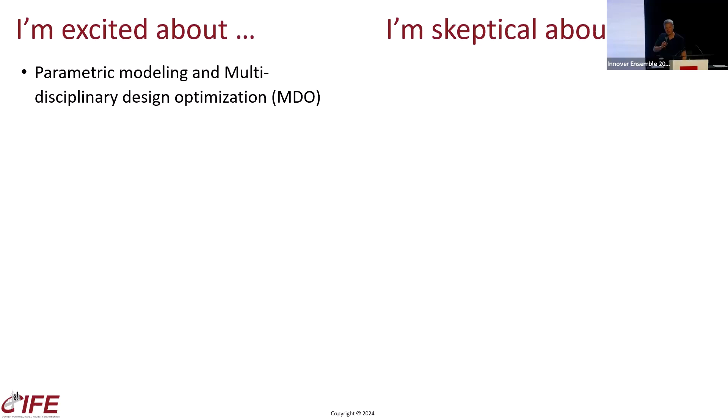I really liked the projects this morning, and I look forward to the others this afternoon. In the context of things that get talked about a lot, I just want to say a few words about things that really excite me, and then things I'm a little bit skeptical about, but would be happy to adjust my skepticism if you give me good reason for that. I really continue to be excited about parametric modeling and multidisciplinary design optimization. I think we can do a lot more with that.

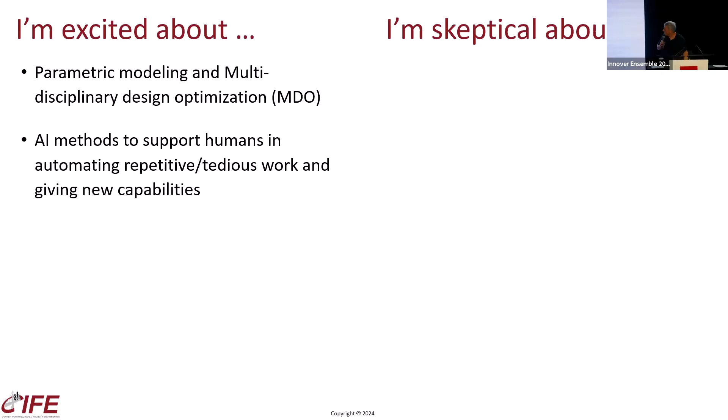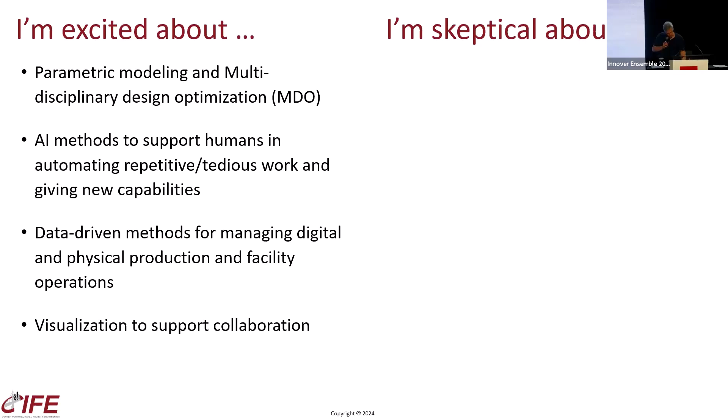I also like, as I think Danielle presented, AI methods that really support us humans and automate repetitive, tedious work, or give us new capabilities, allow us to do things we can't really do, see patterns in data that we couldn't see ourselves. Like data-driven methods for managing digital and physical production, really good visualizations of all kinds that support collaboration, and the concept of circularity.

Some things that I'm skeptical about are Gen AI and ML on the basis of information from past projects. I'm really not sure about that for two reasons. Few companies or organizations that I know in our field actually have reliable data from the past that is organized in any kind of reasonable way.

And second, I'm not quite sure what we want to learn, because I see the practices we are going to do to be quite different, much more digitally supported. So I'm not quite sure what we will actually learn from looking at data from experiences that were largely in an analog way of doing work. But you can adjust my thinking if I see this wrongly.

And the other one is, I love the concept of circularity, but I'm wondering about the feasibility of implementing circularity at a component level. I see quite a bit of work in that area, but I'm not sure, given our need to really understand the quality of a component once it's no longer used in a building like this, and then finding a marketplace that matches that with other components. Other aspects of circularity I see as a bit more feasible.

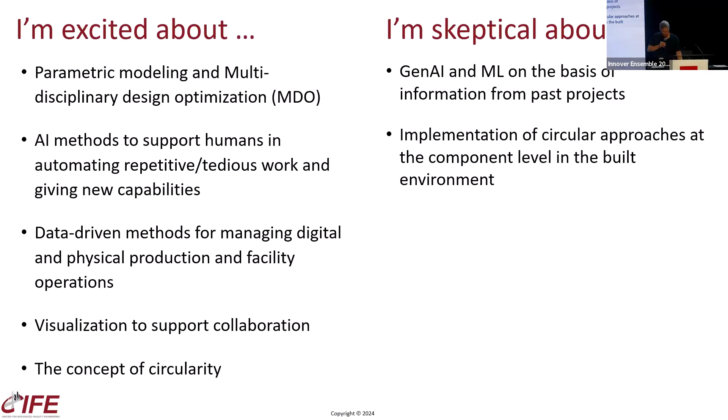So just wanted to preface this. Our approach to industry or academic collaborations has really three parts. First of all, create a solid foundation for innovation by making sure that industry projects are managed and run in what I would say are the best currently available methods that you can just implement because they have been proven to work. We call that virtual design and construction, and I'll illustrate that.

Then on that basis, bring incremental innovations into these practices, into those projects, but also with an eye towards potential future breakthrough performance, and then prototype some breakthrough innovations. Like create a vision of what could actually be possible, and I'll share some examples of that.

Always with industry participation. So every student that works with me and many of my colleagues has to be able to function in the real world, has to be able to perform in the real world at a reasonable level, because if they cannot, then they cannot gain the trust of professionals on which they depend to get data, insights, access to real situations, which then challenge the conceptual thinking and provide really a foundation for strong conceptual thinking.

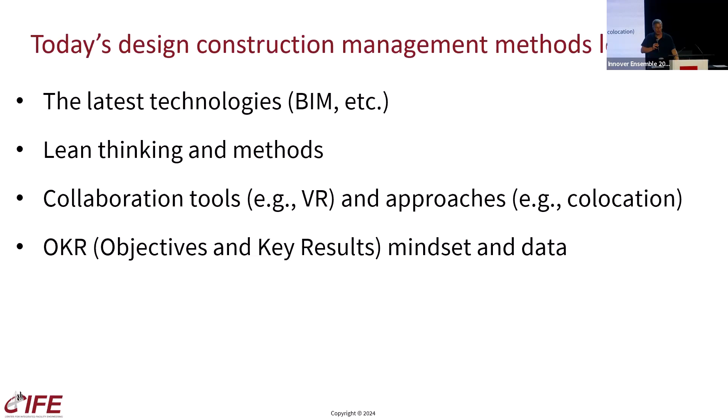This is what prompted us to develop this method, which we call virtual design and construction, which does bring together all of those elements. It connects the definition of objectives from the client and project team perspective with how people work together, how they use technology, and the production processes that they set up and follow. And of course, they are mutually connected, right?

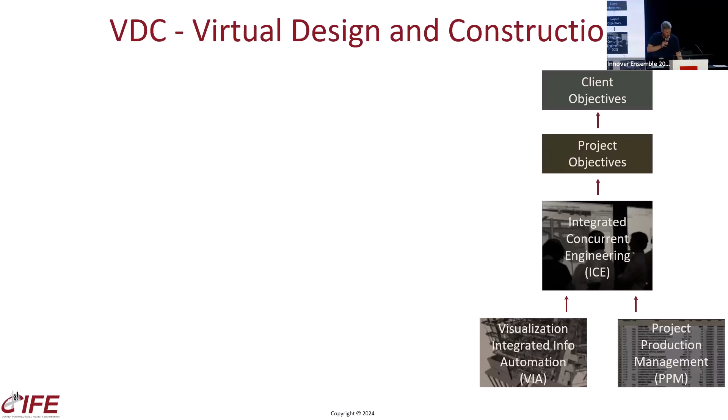If you need to create a particular kind of information, you need the workflows for that. Likewise, you can't carry out certain workflows without certain information. You can't have productive collaboration without accurate, up-to-date information. You can't really take advantage of the opportunity to do things concurrently if you don't design your processes that way. So that's basically the kind of interactions that we teach in this professional education program.

And so these are the last few groups of professionals we have been teaching in various parts of the world. This is a popular method in Norway, which is cool to see because they have some very cool projects there. So you see a little over 200 Norwegian professionals learning virtual design and construction in our professional certificate program. A third owners, a third designers, and a third builders.

And you see somewhat smaller groups, but still nice groups in Switzerland and in Peru. These are lately, for some reason, the main places where people have wanted to do this program. So let me share two examples from projects of how people are using VDC.

One is a few years back, but still one of the most impressive achievements I've ever seen a project team achieve anywhere in the world. And the project team signed up for this incredible challenge because they had actually done the VDC program, and they said, hey, if we use VDC from the beginning all together, we can achieve this.

Because the task was for the Pan American Games in 2019 that were held in Lima, to build all of the Olympic level facilities. In 2013, the Peruvian government said, yes, we will host the 2019 Pan American Games. In 2017, they were like, this requires Olympic level facilities. How many of those do we have in Peru? Oh, 0. How many has anybody here ever built something like that? No. So they had 16 months to design and build these Olympic level facilities for the Pan Am Games.

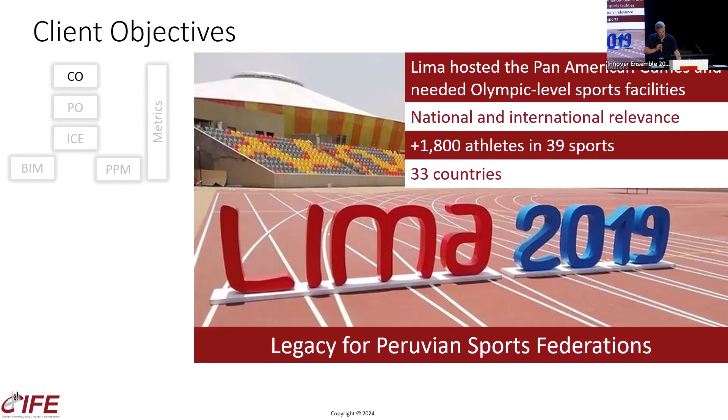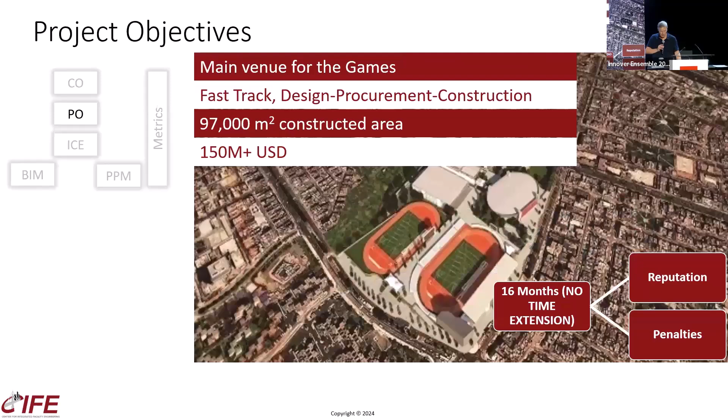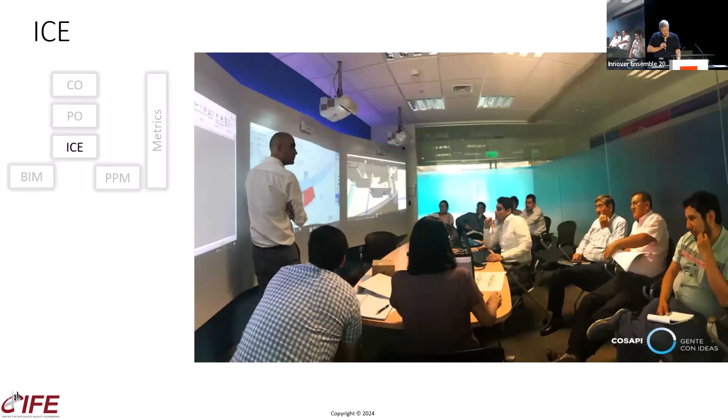So they were very clear. Obviously the timeline was really driving, and of course the quality of the facilities they had to build were really the key things. So they started the project with really intense collaboration. This is a picture of one of those collaborative sessions. Over the first 10 weeks of the project, because you got 16 months, you got to get going, they had 2-hour so-called ICE sessions. ICE stands for Integrated Concurrent Engineering.

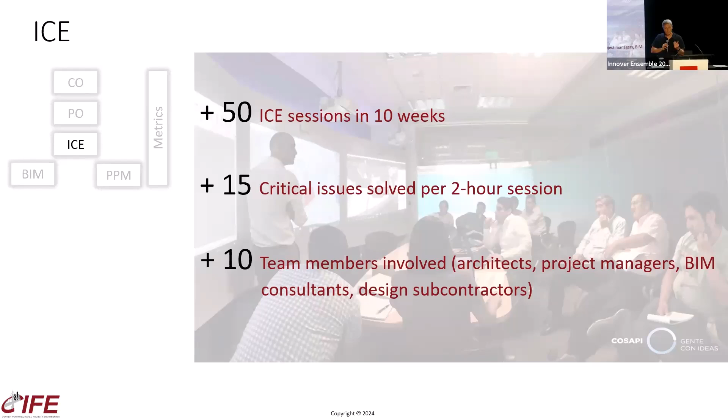This kind of rapid cycle I've seen in other projects having huge benefits because it reduces the number of balls in the air, right? And actually allows you to focus on what you have to actually get done and move on, instead of lots of just-in-case things that we find being tackled in many projects.

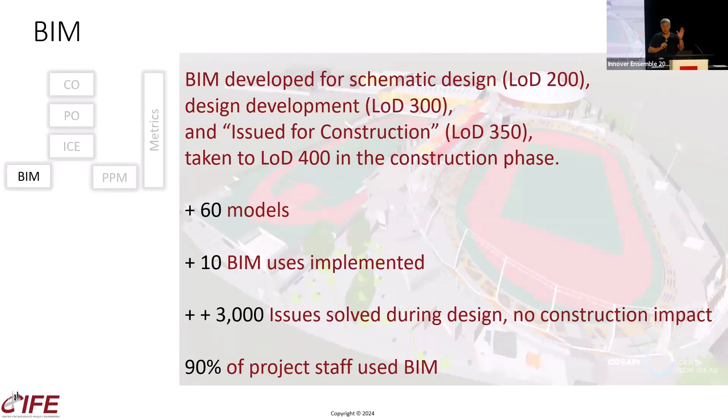They modeled everything in BIM. They didn't say, well, we don't have time for that. They said, no, we can't afford any mistake in construction. So we have to make sure everything we design is buildable and of course then usable and operable. So they had 60 BIMs, 60 different models, 10 main uses, 3,000 issues solved before construction. 90% of the project staff work daily with BIM. It wasn't some sideshow, it was how they did the work.

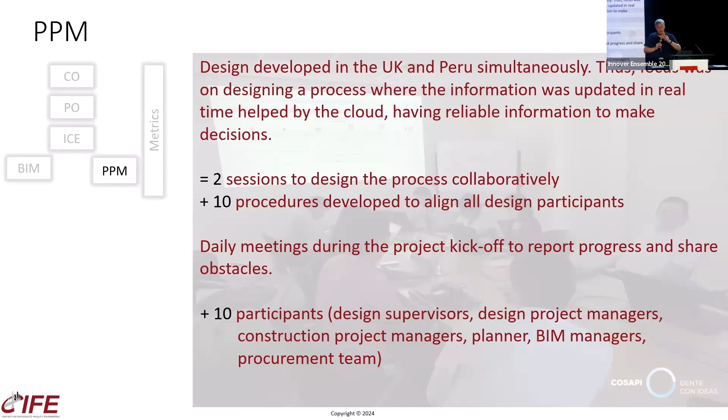And of course, they modeled the many production processes very carefully. They also had ICE sessions to develop those production processes. For example, the designer was Arup in the UK because they had the experience from the London Olympics. But then, of course, they had to be built in Peru. So they had lots of collaborations, had to define the common data environment, how they're going to use it. And they did that also with an ICE session, just to illustrate the connection between these VDC components.

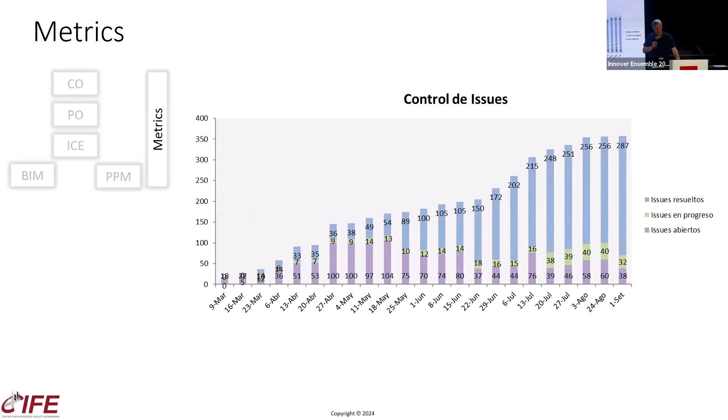And just to highlight some of this, I'm sure you've seen this on projects as well, right? Formulation of the processes, so everybody's on the same page and follows them. And then also definition of the production metrics they're going to use along the way, like every week, to see how things are going or whether an intervention was needed. So this is just a very quick glimpse.

The games, I think, were a huge success. Facilities worked well. And I think it's quite remarkable. You know, the project team said, yes, we can do this pretty crazy task because we will manage it with all the best tools available that we have today.

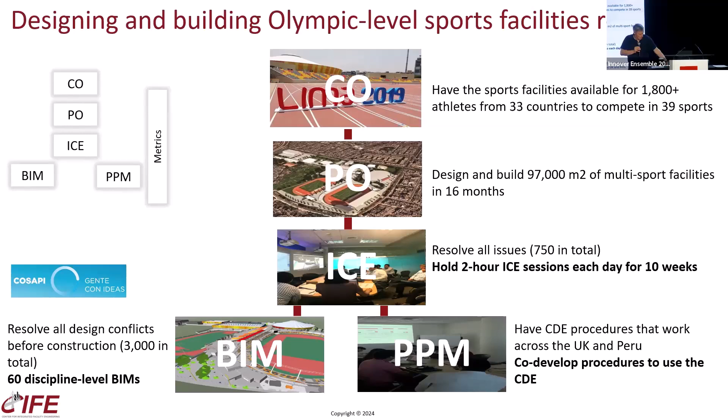A more recent example is actually here from Max. He was in the previous VDC. We have just started a new program like this, but he was in the cohort of professionals that graduated last year from the VDC program in Norway. I'll introduce him a little bit. The program works like this.

Basically, after a week of introduction, everybody goes back to their projects and applies VDC and reports 6 times, 6 months, on how that's going, and basically keeps learning by themselves and together. And so what you will see is what he did to bring the concepts that we teach in VDC to his organization and his projects.

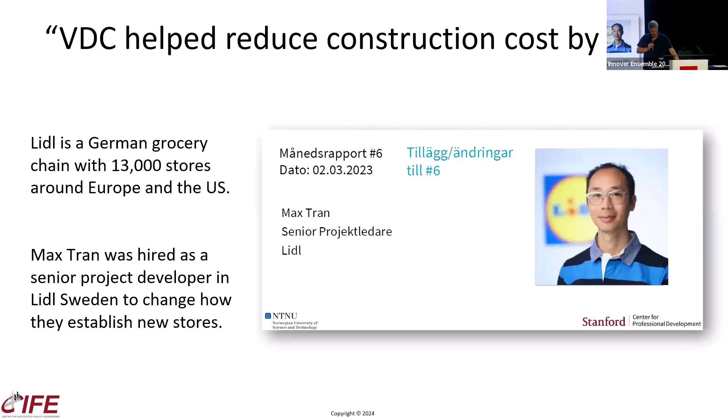Max is basically in charge of all of project management for Lidl Sweden. Lidl is a supermarket chain. I don't know if you know it, quite a big one, I think mostly in Europe. So they build these kinds of stores. He was hired because Lidl Sweden was in this place. So each bar is the cost of construction of a new store in a country where Lidl operates.

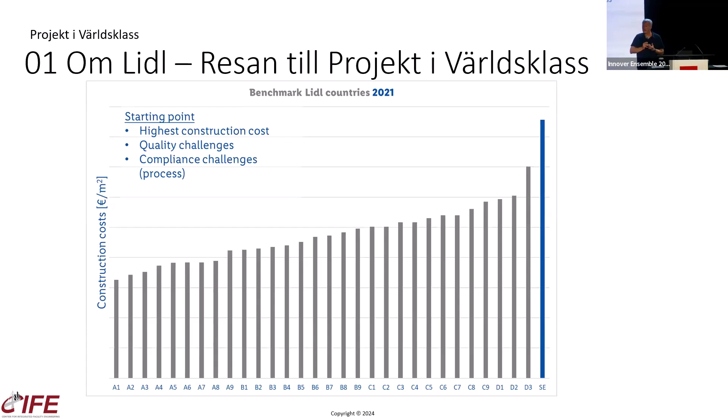So you can imagine how much fun it was for the country manager of Sweden to go to headquarters in Germany with the other country managers and see this: you're the winner of the highest cost per square meter for your stores. Of course, that's not the distinction they wanted to have. So they brought in Max. They said, we have to do something, we have to change. Clearly something is not working as well as it should in how we manage our projects.

Of course, what Max heard when he joined that organization in that role was this. Well, what do you expect? Come on. Each store is unique. How do you want to compare a store in downtown Stockholm with a store at the outskirts of a small town out in the country? They're totally different projects. And by the way, costs in Sweden are high. Everybody knows that. So where else should we be but on the right side of this chart?

Max was like, well, yeah, that's true. Labor costs and so on are high in Sweden. But is each store really unique? This you hear a lot around the world, right? Whether a company builds schools or hospitals or bridges, they're all unique. And to some extent they are. But Max was like, well, let's see if we cannot somehow simplify these stores or create more of a common basis.

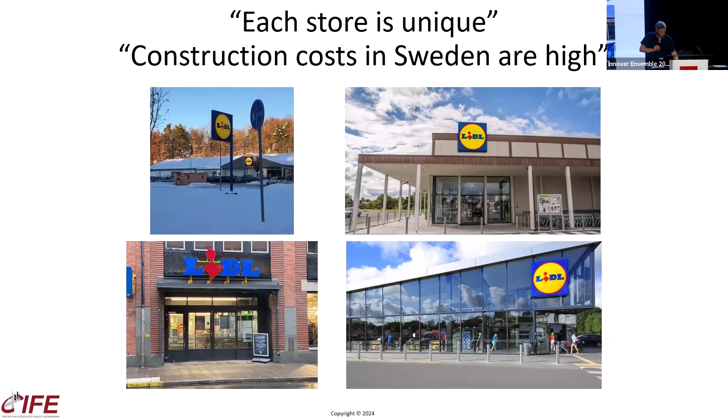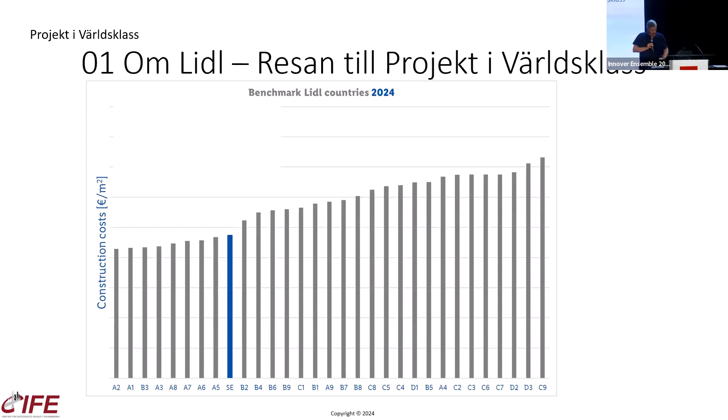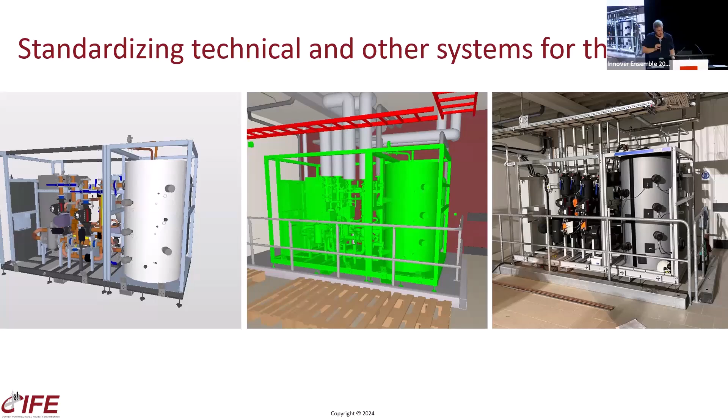And so basically they developed solutions that could work for every store, and the store could just say, yep, that actually works. We're done. Before, they would hire a designer, make the design, review it, et cetera. Takes a long time and ends up with a sometimes questionable approach. Basically, what came out of this is a master BIM, as they call it, at level 350. So quite detailed, that every manager building a new store has to start with.

And then they have to build their project on the basis of this master BIM. Of course, some aspects are local and unique, so they can adjust those. But this allows them to only focus on the things that are truly unique. The rest is like, we've done it. We have learned our lessons. We know what to do.

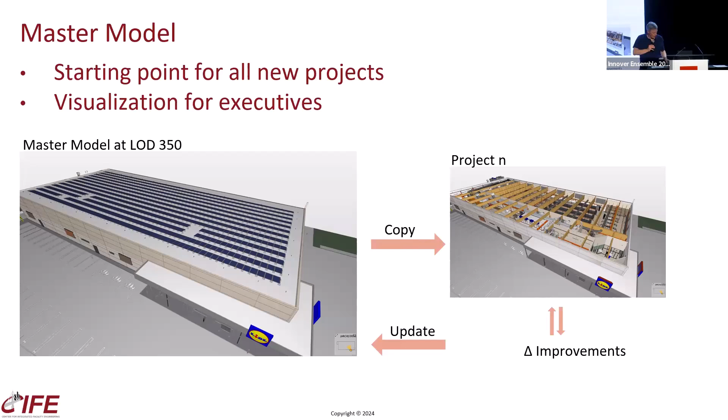And then they're expected to provide updates, improvements to this master BIM from their store so that the next store can start with an even better starting point. Improvements in terms of technical solutions, but also in terms of the information in the BIM, how it's being used and so on. So this has had quite a good effect.

The decision latency, this was actually a few months back. Now it's even better. But even a few months back, they made 75% of decisions within 1 week, and almost all decisions within 3 weeks. And you could say, well, the key thing is not to change your decisions. You can make a decision fast, but what's the point if you change it later? But they only change 1 in 33 decisions. So they also make good decisions that they can stick by.

Actually, the most recent data is their decision latency is 1.1 days with a variance of 1 to 5 days. So quite predictable. Before it was, I think, right around 5 weeks with a variance of 1 to 16 weeks. So nobody could really count on when the decision was going to happen.

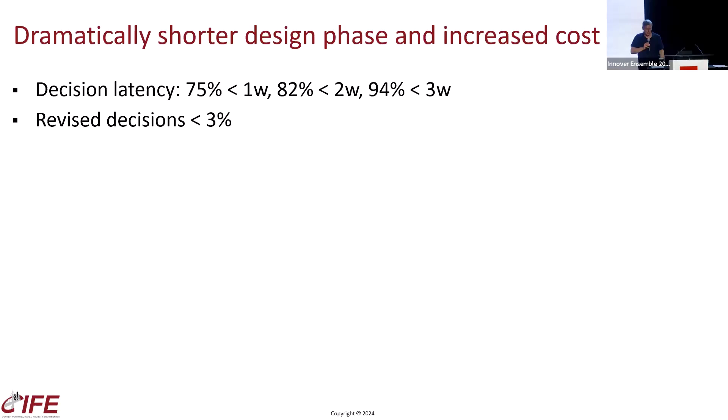They're able to put the design for a store out to bid in 2 weeks instead of several months before. The design cost was reduced by 80%. The designers might not like it, but from a client perspective, not bad, as we say in Switzerland. And of course, they have to pay for the upkeep of this master BIM, but actually found that even though it provides much more value, that's actually cheaper than what they paid to maintain sort of the information they had to give to bidders anyway, before, as you can see.

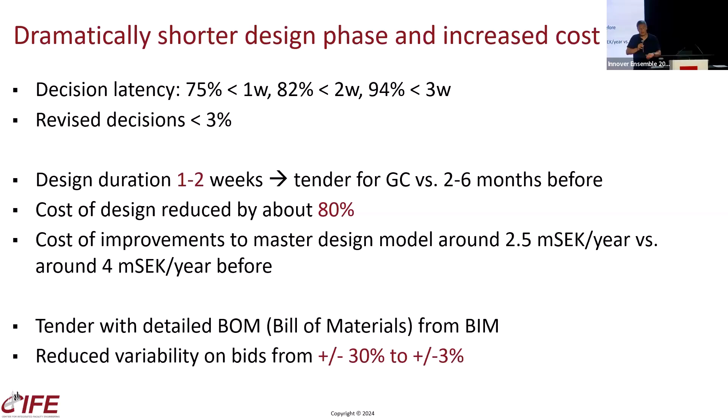And they have seen, because they go out to the market with a detailed bill of materials, so a client has said, this is exactly what we want, so this is what you need to bid, general contractor. So the variance in the bid has gone down from plus minus 30% to plus minus 3%. So much more certainty. So these are a couple examples I wanted to share from bringing VDC to projects.

I think the deployment of VDC is within reach of any organization because we're not expecting an organization to do something that hasn't been proven in terms of how to manage production, organize processes, orchestrate processes, how to collaborate, the technologies, setting of objectives, and so on. But that provides, for me, a better foundation. Why I'm interested in teaching this is I want to start innovation, improvements, in the context of what I would consider good practice, not average practice. Because I think that's what I feel our role is, to advance together with industry.

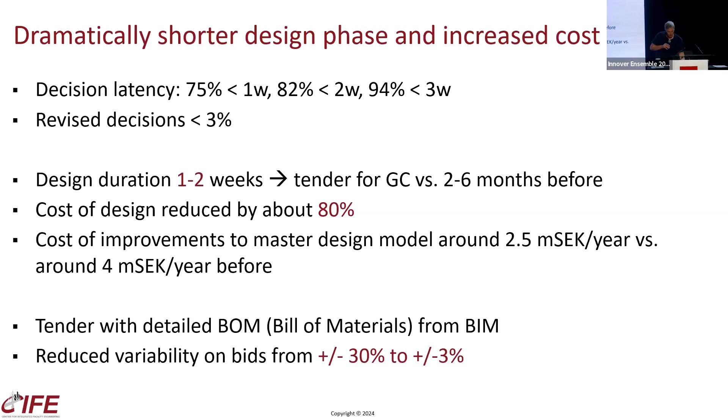So I want to share a couple examples of bringing incremental innovations to projects. There's quite many. I'll give you the list in case you want to connect. And if we went to recent projects, there would be many more. But one example is around virtual reality, construction robots, and generating data-driven insights. I want to just briefly share.

So this work is by Simge, a PhD student in my group, originally from Turkey. And this was actually the early days of her VR involvement. She should finish her PhD next year, and has focused really on articulating the value of VR design reviews in the coordination of MEP systems for complex industrial structures.

But she started by working on the largest wastewater treatment plant in San Francisco during the pandemic, where the project team sent headsets to all the key participants, and so everybody was in their home office, but then working together in VR to, in this case, improve the maintainability of the key mechanical room of the wastewater treatment plant. I imagine similar things like this happened around here as well.

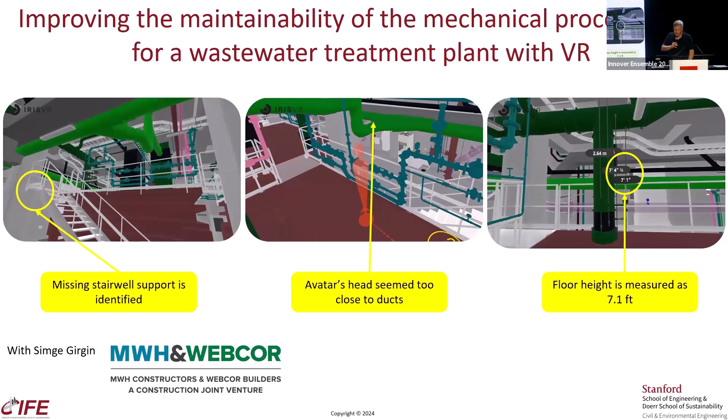So I think this was a nice way of supporting a team with bringing an innovation to the project, because she could master the technology, understand what the project needed, help bring the technology to the project, and then document how well that was working. Things that are difficult to do for a project team when they're in the middle of the project.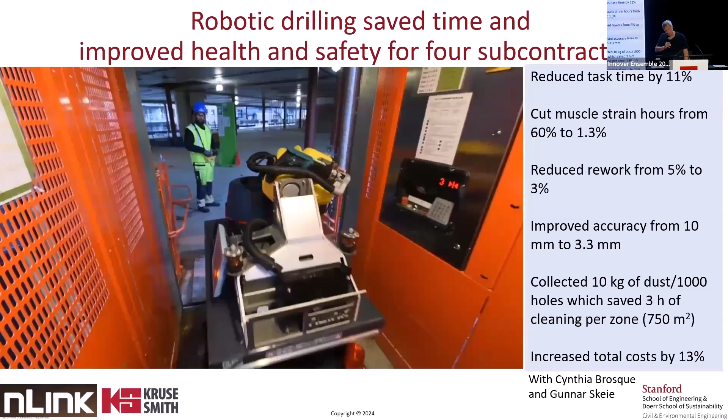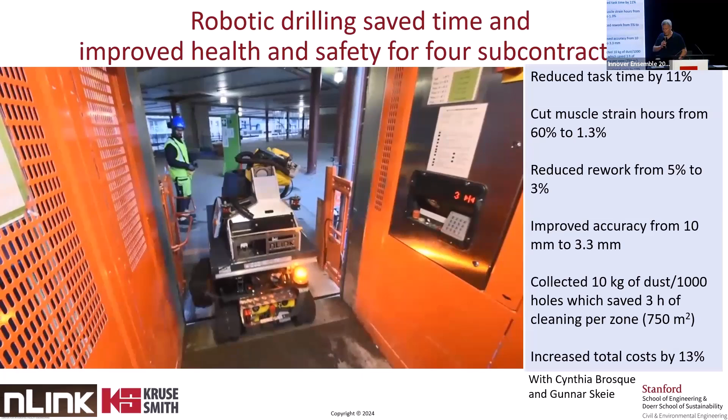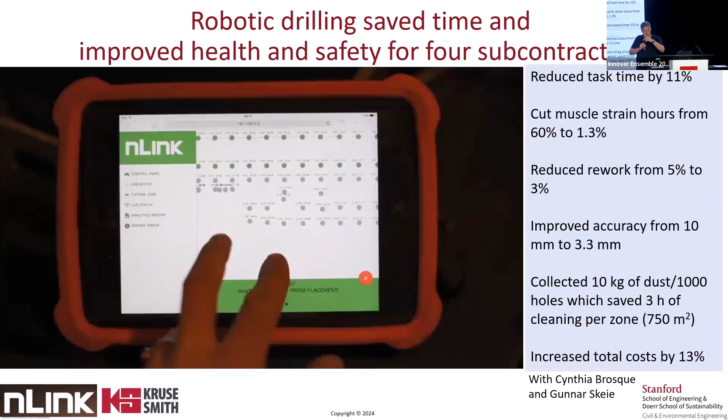Another example is this work by Cynthia. She finished her PhD a couple of years ago, actually an architect from Uruguay, but she wanted to do construction robotics. And the first case study we were able to do with a company in Norway, Kruse Smith, was, I think, the first deployment, at least that I could find, of a robot that did actual work on site. And this was really interesting because this is for drilling the holes for the installations in the concrete slab. And they did half the project with the robot and half the project traditionally. It was amazing for a researcher to see that opportunity.

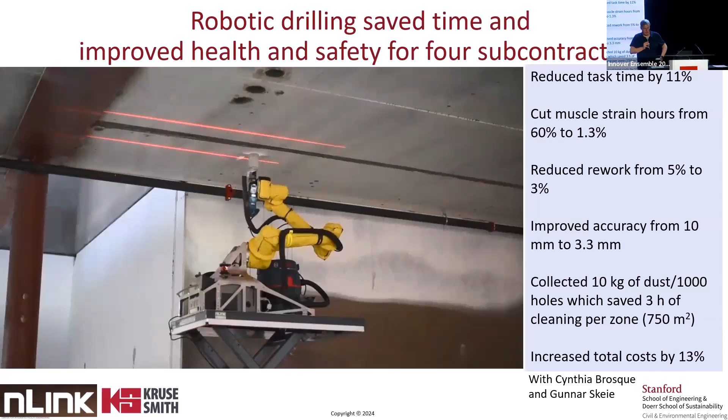And so we worked with them to understand really the differences, not only on site, but also the collaboration work, the BIM modeling work, and so on. And I was initially quite skeptical when Cynthia wanted to work on construction robotics. Said, we've tried this. Normally I don't have that attitude, but there I had. And she said, well, why don't we try? I said, okay. It's tough to tell an enthusiastic student, no, you can't do that.

And so I have to say, I was really surprised by the data we found on this project. I mean, for the first application of a robot, I think it was quite cool because the schedule was a little bit better, but dramatic improvement in the ergonomics of the work, 98% reduction in the strenuous work, better quality, better accuracy, cleaner site.

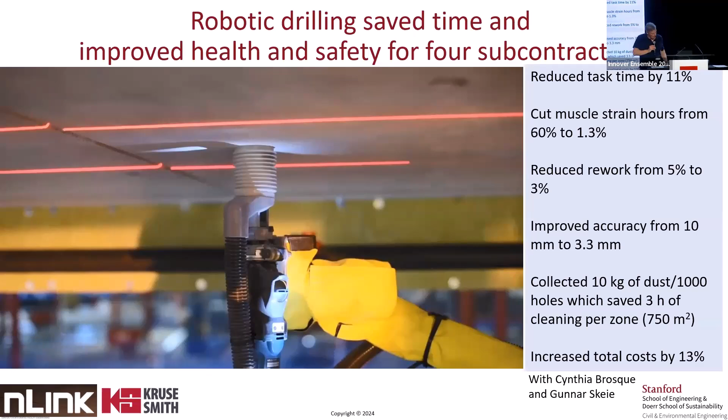Cost was a bit higher, 13%, but I thought, okay, for the first application, I think it's quite good. And so we also published with our industry collaborators a quite detailed paper exploring the difference between the traditional work and the robot-supported work. And we have now done about 40 case studies in 8 countries with about 30 different general contractors on the application of various types of robots on site.

This happens through a class we do, a construction robotics class. Actually, you would be welcome to participate in the class if you want to do a case study here. I would love that. We have worked with other universities in that context. It's in our spring quarter.

And so if you want to be on a similar schedule, then the cost is very high. Or if you just work with one robot, the costs are kind of okay, but then the schedule is actually not better. But in other cases, we have seen also some significant improvement, as you have seen. So

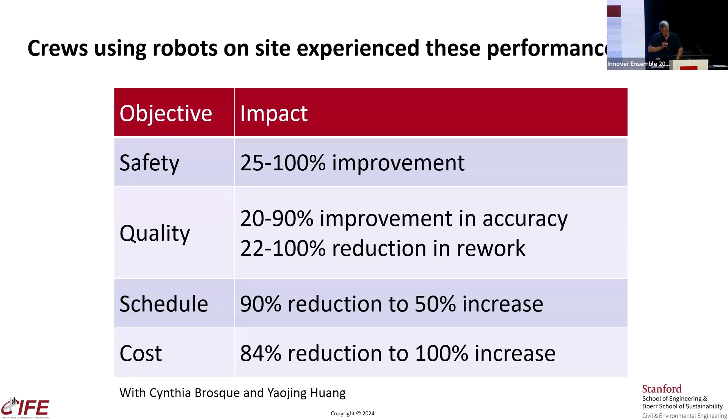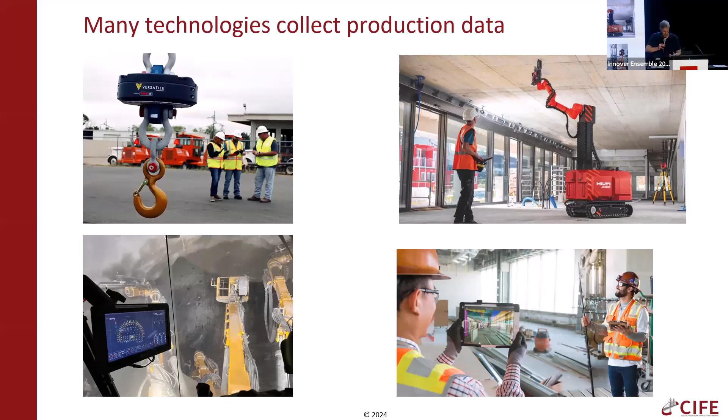the third example I want to briefly share is gaining insight from all the data we can collect. It's really quite remarkable over the last few years how much data we can collect, not just in the factory, but on site in terms of production data, and also for the design process with common data environments and so on. Many ways of collecting data. I want to focus here on the example on the left, an IoT-enabled crane hook that's on the market by a company called Versatile. Started in Israel, but now in the US and I think other parts of the world.

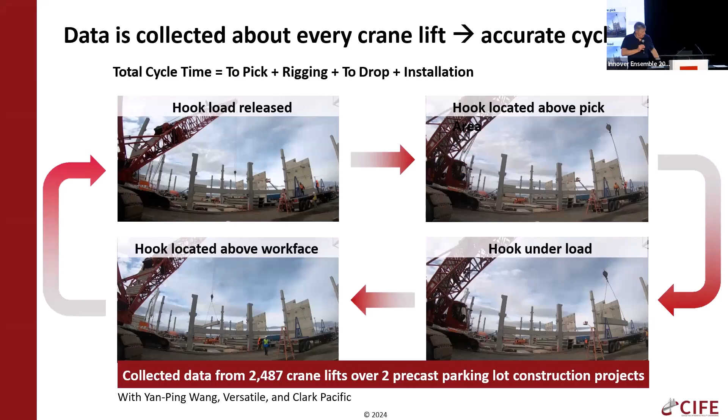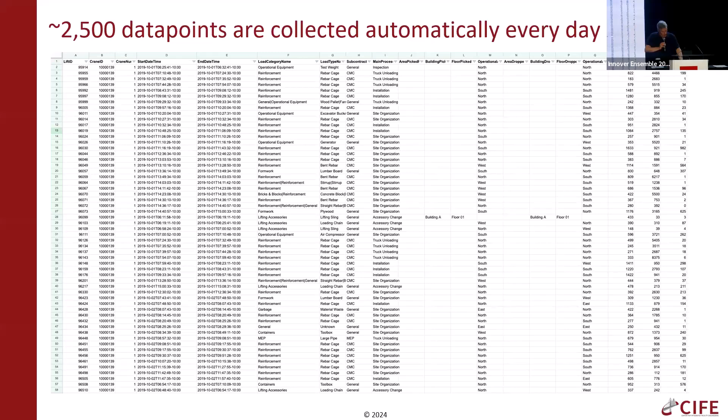And basically this crane hook gives you data on every second of what a crane is doing. So you're getting quite a bit of data. It depends on the project, of course, and the number of crane lifts, but on the projects where we have been working with general contractors, it's about 2,500 data points a day. So over a few months, there's a little bit of data to look at. And so I want to show some insights you get from looking at the data.

This is also done in the context of another class, a class that I actually teach at the moment. We'll have final presentations in a couple of weeks. We have done a similar project. So this was a collaboration with HDCC, the largest contractor in Hawaii, building condo towers in Honolulu, typically 43-story condo towers. So this is data from 2 condo projects from last year's class, just to highlight the kind of insights you get from the data.

For example, the data showed that there is a 15% learning curve with every doubling of the same types of operations. We've always talked about learning curve, but I had never seen it really quantified. So that's super cool because this learning curve happens even if the lifts are higher and higher, right? You go up. So even though you have to transport things further, the cycle time is actually less because the crew clearly learns.

It was also interesting that just after we saw the data, I happened to be on one of their sites and we ran into the most experienced person from HDCC building these concrete towers. And we asked him, hey, is there a learning curve? And if so, how much do you think it is? And he said, yeah, it should be about 15%. It was amazing. He had absolutely not seen the data. And then we said, well, here's the chart. This is all the data.

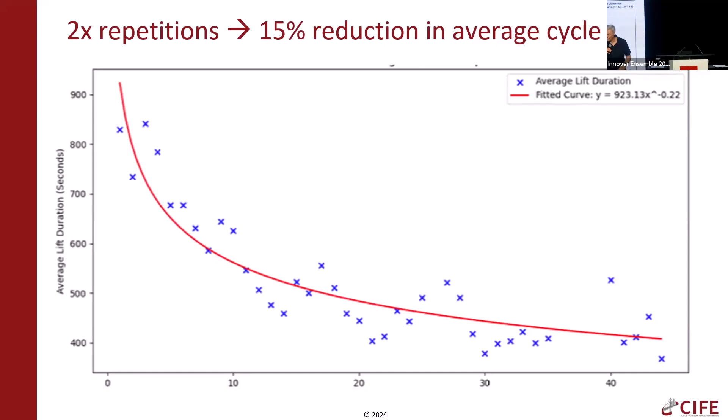So they were happy to have a quantification of this learning curve. They're also a bit surprised to see that the cycle time when they do overtime on Saturdays was quite a bit higher than the normal days. It was also interesting to see the cycle time in overtime during the weekdays was actually less than the cycle time during the normal day. I guess the people wanted to go home, and on Saturday, I don't know, they figured we were there anyway. We're not totally sure why, but anyway, it was interesting for the company to see.

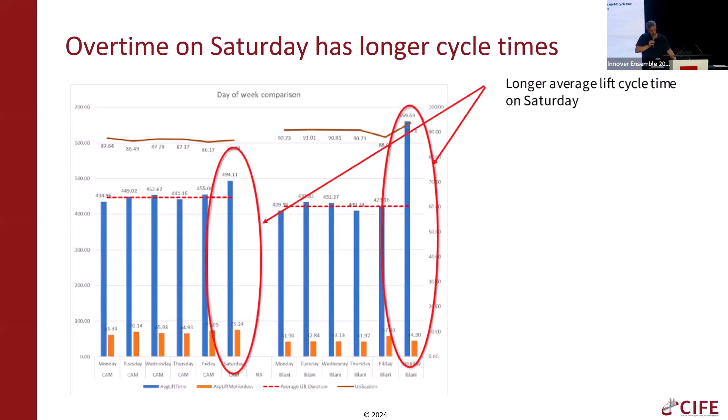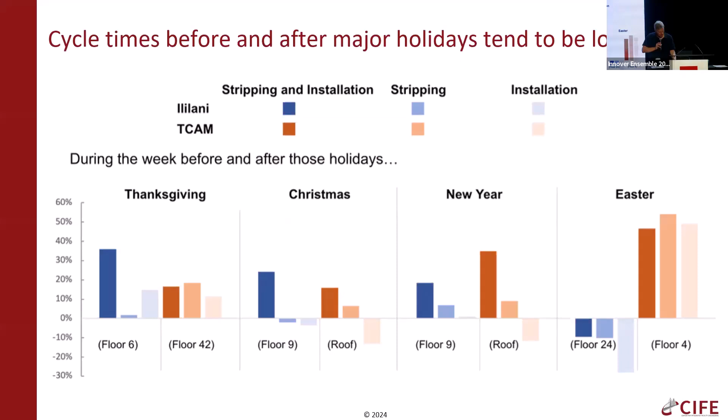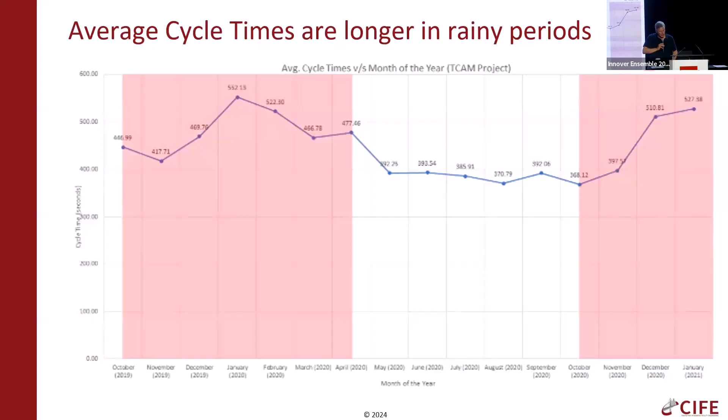It was also a bit of a surprise that the cycle time was longer before and after the holidays. After holidays, they could kind of imagine because people get back and they have to remember. But before, they had actually expected to be maybe faster, thinking people are kind of anxious to get out of here. But the data showed no, it actually tends to be longer before and after the holidays. The data confirmed that indeed during the rainy seasons, the cycle times are longer than during the non-rainy season. As you can see here, the shaded part is the rainy season in Honolulu.

It also showed that it really pays off when you do as many consecutive lifts of the same type as you can. Then you have much less idle time than when you don't. So in terms of planning the work, right? Because you don't want idle time. I mean, you have 43 stories to build, right? The crane sits idle, not a good thing.

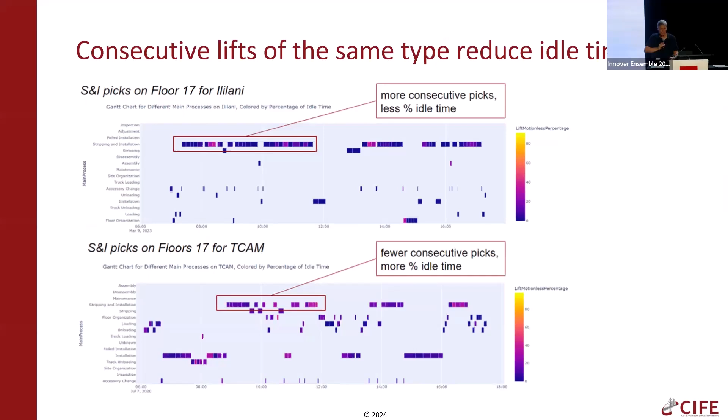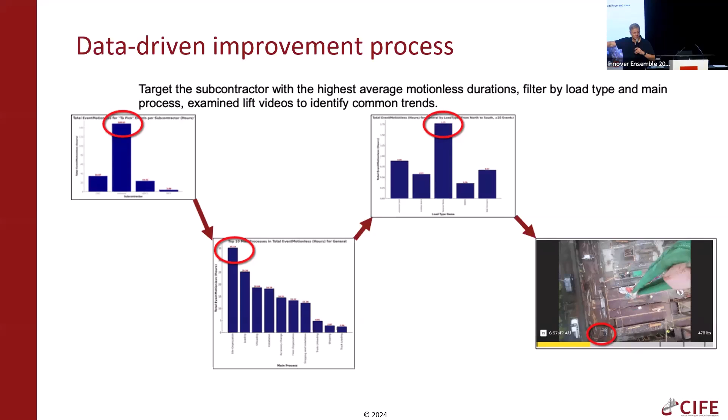So basically, what this showed is the analysis of the data allows you to quickly see where things are going just fine. And you have benchmarks to other projects that are not just anecdotes. And it allows you to see where the outliers are. And then the project team can focus on those and see what's going on here. So a much more productive use of people's expertise.

We continue to work with HDCC, also a bit on the research side, to build really sort of a data-driven construction management approach. And for that, they need data about everything. So here they get data from the crane, but the data they don't have is how the work they self-perform, the concrete, is actually going. But they have a 4K camera on the tower crane, so we have video of the construction of all the towers they've done.

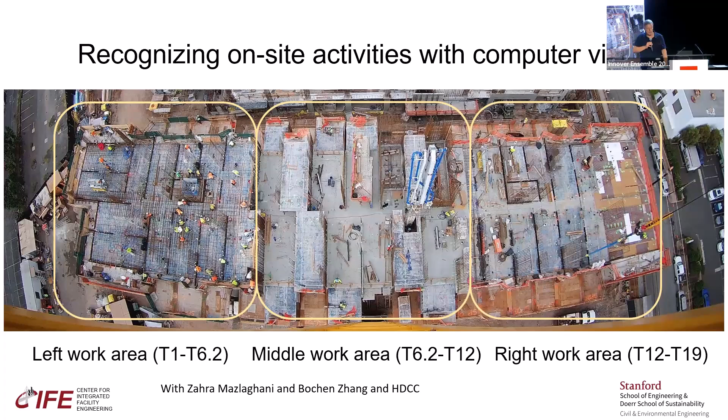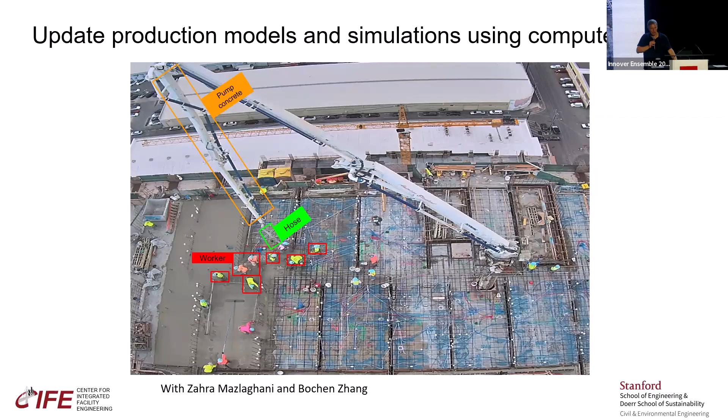And so we are in the process of developing a computer vision method that recognizes how many people are laying rebar from when to when, in what zone, how long it really takes to place the concrete, etc. So that we can then feed a digital twin of the production process with the actual data that we can then simulate and understand the production better. And again, give less experienced project managers a tool that encapsulates a lot of the experience from the experienced project managers.

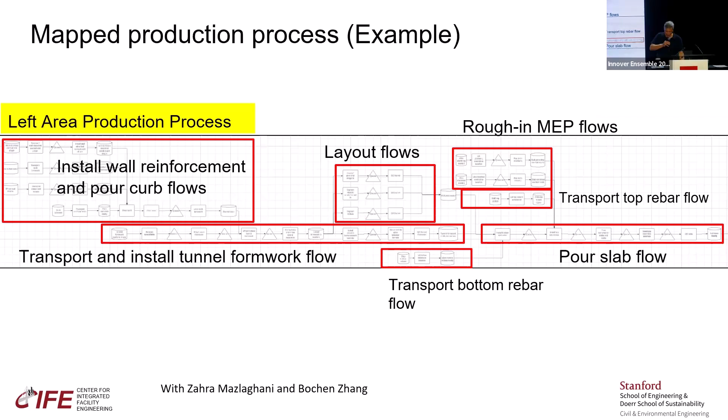Through all of these projects, we used the digital twin framework that we came up with. Since the word digital twin came up a few times, we were asked by our industry collaborators, couldn't you come up with a framework like 1 to 6 or 1 to 5, as we have for autonomous driving, in terms of levels of digital twin? And we tried and tried and tried. We couldn't figure it out. And eventually we realized why. Because as complicated as autonomous driving is, you're talking about one actor, a driver, doing one action, driving, with one product, a car.

Now, in our industry, we have many actors, architect, rebar layer, mechanical contractor, what have you, many actors doing many kinds of actions on many kinds of components at many different scales. So how can we come up with a level 0 to 5 framework of digital twin that fits all of these? So instead, the best we came up with is this framework where we say, for everything you do, you need to get data, you need to make sense of data, you need to make a decision on the basis of data, and then you need to implement the decision. Then you can get new data. And you have routine work, and you have non-routine work.

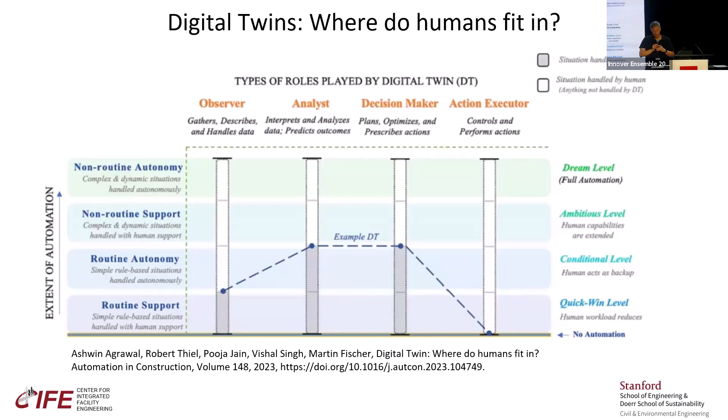So whatever the situation, you can now draw with a line the performance of the digital twin you have today and where you'd like it to be, understand the cost it would take to go from one level to the next, and the business value you would get from going one level to the next. So we have quite many projects going on right now that work with industry partners to bring innovations to their projects.

Quantifying the environmental impact of industrialized construction practices. If you go to the websites of all kinds of industrialized construction companies, one of the first things you typically read is, it's greener. We have gone to many of them. Not a single one had data to actually show how much, or is it really? So we're working on that. I shall share these in case any of you have interest here. We'd love to collaborate, of course.

We've been working with building owners and operators on strategies and policies to reduce embodied carbon in buildings. Yeah, operational carbon is big, but embodied carbon you spend now. So if you do a net present value analysis of the carbon, it's also very good to save carbon at the beginning of a project, which is the embodied carbon. So we worked with Stanford buildings and real estate people and developed policy and approach to reduce the embodied carbon by 20% for the time being.

Formalizing client objectives. I think this relates quite closely to Brenda's project this morning. A multi-stakeholder metrics framework to assess MEP system performance. Yeah, we're excited about automating, optimizing design, but for that you need the criteria. What is optimal? And as soon as you start to think about it, you realize from whose perspective. And we haven't been able to find actually a framework that puts all of this together.

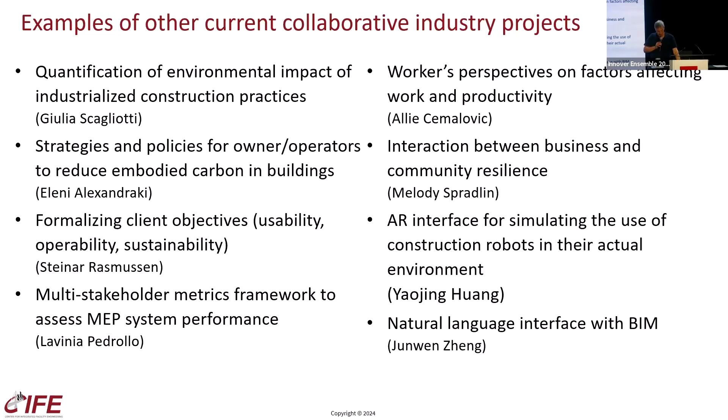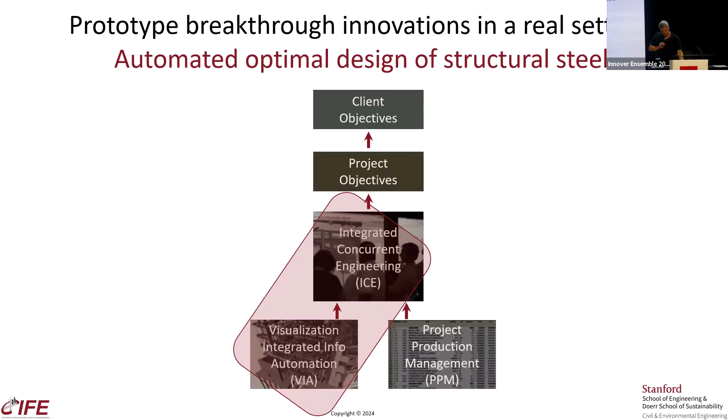So now I want to share a couple of more breakthrough-focused examples of work that really push the envelope as far as you can push it, and give a glimpse of what might be possible in the future. So the first one is focused on automated optimal design of steel structures, which really fits in the context of collaboration and automation in the VDC framework. This was work done a few years ago by Filippo in collaboration with the project team, DPR Construction, a developer, structural engineer, steel supplier, fabricator, erector.

And Filippo came to me and said, Martin, I think we can fully automate the design of code-compliant structural steel for a major building. Much bigger than what we can show here. Like in the morning, we had to sign an NDA, of course. So we can't really show the building, but these were buildings in downtown San Diego. So the kind of buildings you see there.

And I said, what do you mean by optimal? He said, well, really cost optimal, not just optimized for material cost, like methods you can find today, but optimized for material, fabrication and erection cost. So it took us a while to find a project where everybody was willing to share all of this data, at least with us. Well, eventually we succeeded. It took a few tries. I shall not name the companies that said no, we're not interested.

So then from a research perspective, we were wondering, okay, you can do it, but is there value on a project? But also from a practical perspective, of course, they were also interested in that. So this is how we try to align the research question and interest with the commercial interest.

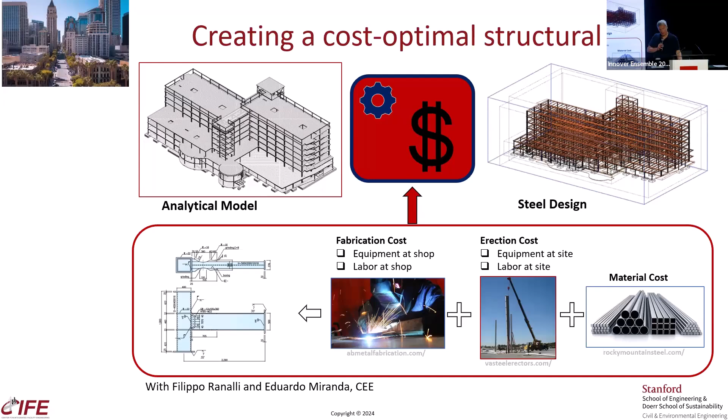And so this is data from the second building, where the automated method produced the design in 1 hour versus several weeks for the typical method, and saved almost 10% in the cost of the structural steel. This is a composite structural steel with the metal deck and concrete, typical structure on the West Coast. And it's interesting to see that pretty much all the savings comes from the details.

So this also shows the value of doing things concurrently. Because in today's process, you do the conceptual design first, and then later you do the details. And you might be lucky that your conceptual design aligns really well with what turns out to be producible, affordable details, or not. And here, it wasn't too bad, but still, right?

Through the iteration, because we do it concurrently, we can pick a conceptual design where the details also work together, and you find the optimum between the main structure and the details in terms of cost. And so that was also interesting to see, because people always tell me, Martin, integrated project delivery is cool, but how do I know I have the cheapest cost?

Well, if your competitive bidding saves you 10%, maybe you should go ahead if you can afford the time. I mean, this is one case. It's not necessarily always 10%, but in this particular case, it's 10%.

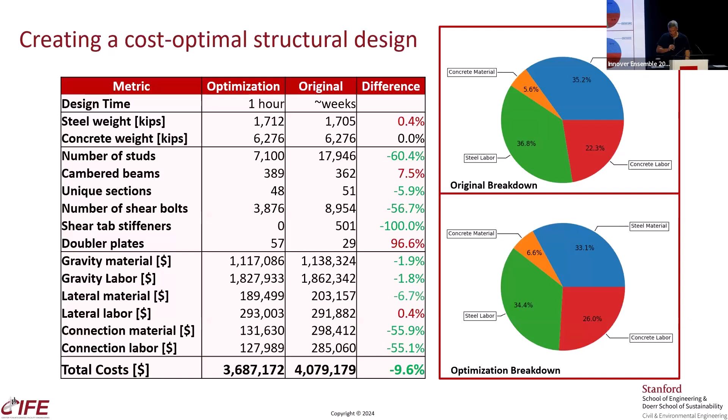So that's an example of a kind of a breakthrough innovation, automating a major part of a design. Imagine if this was really available, the interaction between architect and developer could be very different. If you knew for every architectural scheme you have an optimal structural design in 1 hour, you could start to think of developing projects quite differently. Of course, we need it on the mechanical electrical side as well. So there's still some room for a few PhDs.

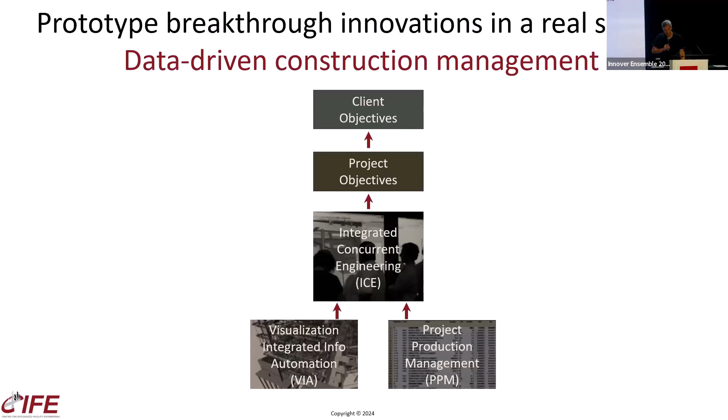Another example, building on the vast amount of production data we can now collect, is truly data-driven construction management. We were able to prototype this together with a precast company. This was on a parking structure near San Jose Airport, about 1,200 cars, something like that. And as a precast company, you live and die economically with ordering the right number of parts for tomorrow.

Because the precast components are made in the yard, and then you have to tell them, tomorrow, send me these components. And if you guess right, then you have exactly 8 hours worth of work. If you guess wrong, you have wasted capacity if you don't order enough, or you have to pay overtime. This is a super good company, the most competitive precast company on the West Coast, Clark Pacific.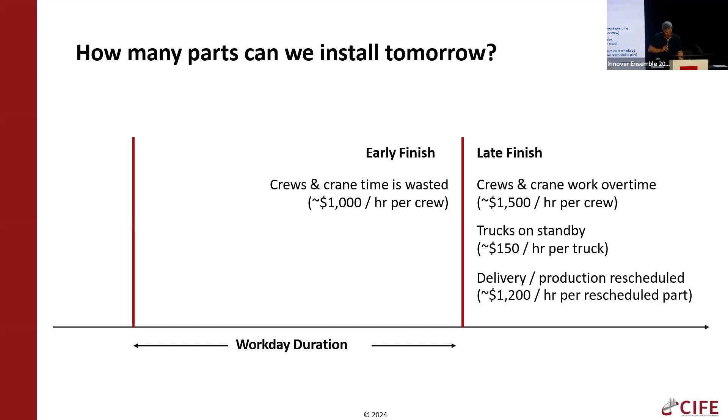Here is the cost that they incurred if they order under or over. They were on average 2 hours off each day. So this is a good company. This is what they're able to do with today's method, which is basically based on using average production rates, because that's all the time you have to collect data. You don't have time for somebody to stand there all day and really pay attention.

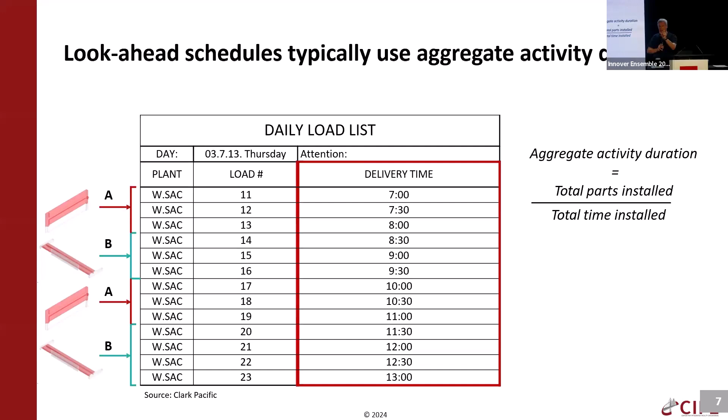So we were curious, if we use the detailed data to decide what to order tomorrow, because we're learning on this project every day what is actually going on, could we make better decisions? And so this is the data for the whole project, 61 days of installation. In gray, you see what the project team actually ordered.

So you can see on some days they were pretty good, because if they ordered exactly the right number of parts, they would be on this black line. So on these days, they were actually quite good, but on other days they had 4 hours and more of overtime that was required.

And then we basically pretended to do the project again, just on the basis of the detailed data we get from the crane hook, the thousands of data points a day. And you can see the color dots. I won't go into the difference here for sake of time, but on almost every day we could have made a better decision that matches more closely what then actually happened.

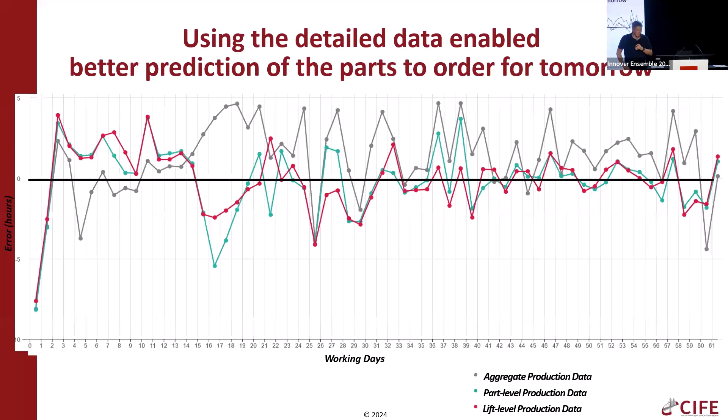And overall, we could have reduced the forecast error by 50% with the data-driven methods. So only plus minus 1 hour off. And we fully automated, had to, the planning process for the next day. You can't make it by hand, right, looking at thousands and thousands of data points. So giving somebody on a project 2 hours off, or 2 hours to do something else, or going home 2 hours early, whatever the case may be.

So this was a kind of a glimpse. I think something we have to really work on is this digital twin of production processes. We've seen the value of a digital twin for our product, right? BIM and its applications. And we don't have something like this for our digital and physical production processes. Not just something to look at, but something to really simulate, compute these processes. So that's a key thing we're working on, and again, love to collaborate on that.

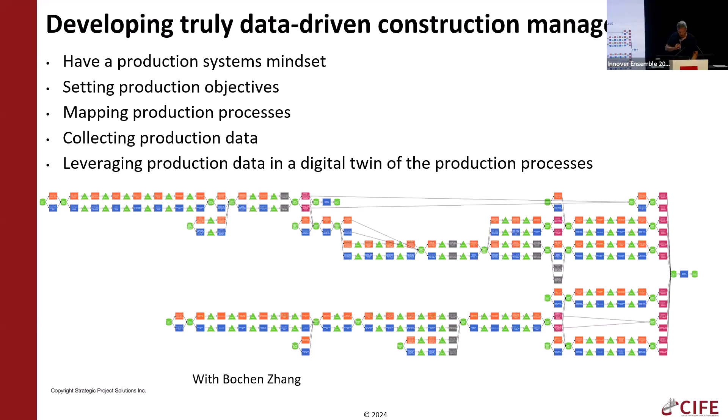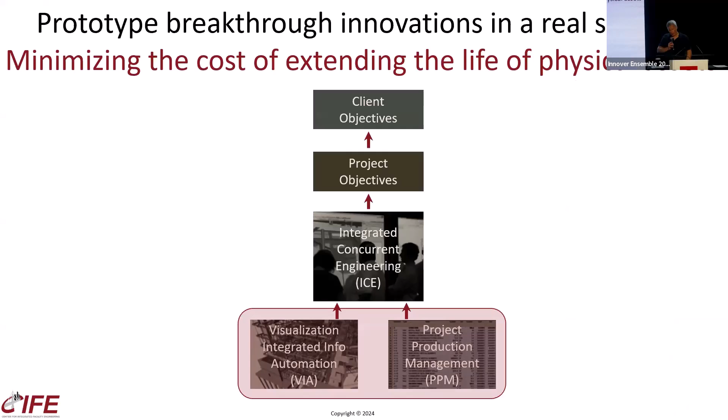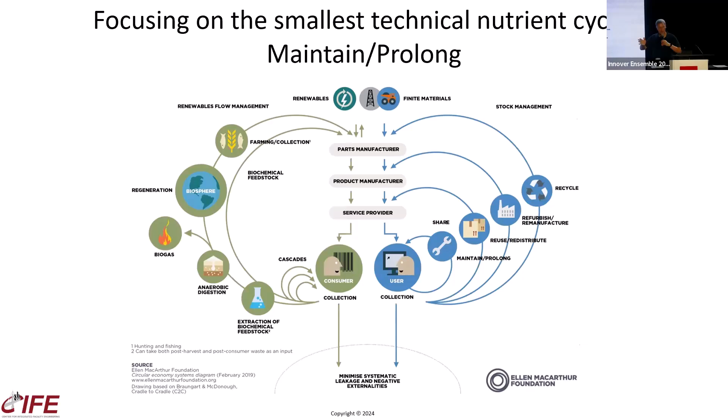The last example I want to share is a project we are quite early on. It relates to, in a way, digital twinning of the operation and maintenance of, in this case, roads, but physical assets in the context of circularity. Right, the closest loop is the maintain and prolong loop. So to the extent we can maintain and prolong the life of a project, we don't have to throw it away or recycle it, take it apart, etc., which is much longer, much more.

And so, of course, for roads, you can detect defects easily now. As in startups, you can just basically buy the technology. What is still difficult to do is to scan a road now and in 6 months, and then really match up each of the defects with the defects from 6 months. At least the research we have done shows that this is very expensive to do, out of reach of project teams.

So this is basically what we're working on, trying to see how we can match different scans to understand, yeah, the road was fixed, or this is getting worse, this is getting much worse here, much faster than over here, so that we can match up the damage and the change in damage with the appropriate maintenance and fixing strategy. Because of course, the sooner you fix something, the cheaper.

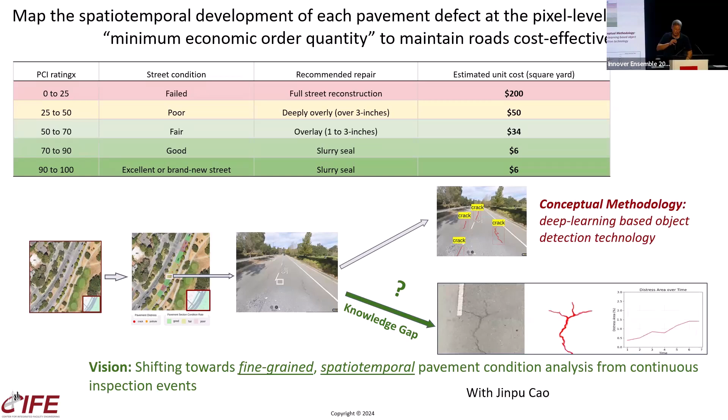So we have a couple other examples of breakthrough innovations. One maybe, I think, a little crazy. We'll see how far it gets. Basically, the idea for an architect, as soon as they start sketching, to immediately build a semantic BIM in the background, right? Looking at millions of buildings that have been made and saying, this sketch could be this kind of building. And so that you can more rapidly give feedback.

So Alberto is an architect, has worked as an architect, and he says, this was the most frustrating thing for me as an architect. I would create a sketch. The client and we would fall in love with that building. And then a month or two later, we would get feedback from some analyses: this is some kind of a dream you're having, this is not going to happen. And then we had to painfully change the design. And so I'd love to get this feedback quickly before I fall in love with a particular design. That's sort of his motivation.

We're working with a company building industrial facilities to basically create a design method that optimizes the use of industrialized construction methods in the construction of those facilities. And we want to bring, sort of marrying local construction practices and industrialized construction practice in developing parts of the world.

Simi, the PhD student, is from Lagos, Nigeria, and she observes there, as in many other places, just an incredible lack of affordable housing. And she also observes that the local methods, yes, they work from a cost perspective and from a comfort perspective, but are too slow. And when you show up with industrialized construction methods, yes, they're fast, but they're too expensive to build and operate. So trying to see how we can marry the two.

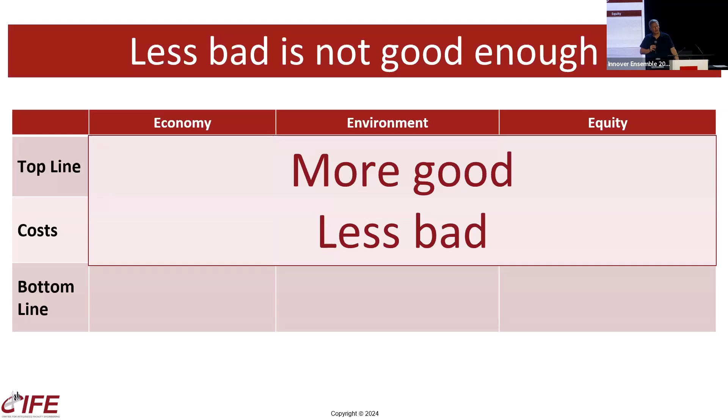I'm a bit sad when many of my colleagues at Stanford interpret sustainability as minimizing environmental costs. Of course, we need to do that, but I think the real challenge and opportunity in sustainability is much bigger than that. And for that, we need technologies, but we also need different frameworks to do projects. One of the most remarkable examples I've seen, just to close on this point, is the Aquatic Center for the Olympics in Paris. That was really a cool project for me to learn about, built by Bouygues.

Whoever decided in France about the Olympics said, okay, we should use at least some Olympic facilities to upgrade these stressed areas. So they put the Aquatic Center into Saint-Denis, which is not the most thriving part of Paris, and they wanted to uplift the community. And they said, okay, bidder, you have to design, build, and then operate this Aquatic Center for 30 years. And operate means you run the Olympics, you run the European Swim Championships that are on the horizon, and the rest of the time, you run it as a swim center for the community. Parents can bring their kids to learn swimming, there's a water polo club, whatever, right?

And as I talked to the project executive, he said, when we looked at this, we quickly realized that the big cost for this project was the treatment of the humid air for 30 years. So we did everything to reduce the size of the swim center to the maximum possible. So we built this pool that is really expensive because it needed to be configurable into 26 different configurations by moving the floors, moving the walls, etc. I still would love to go and see that. The concrete was still under construction when I visited the project.